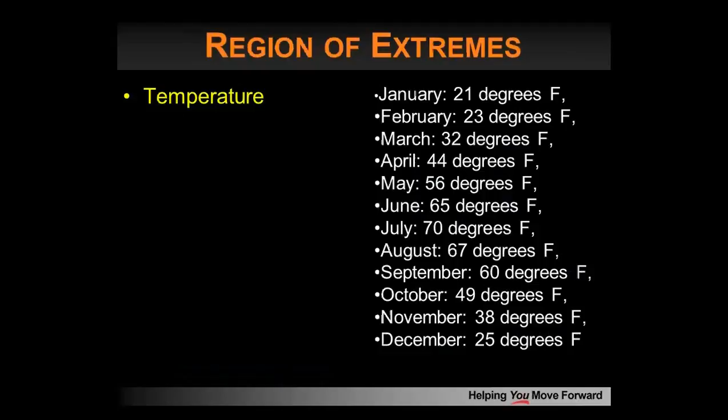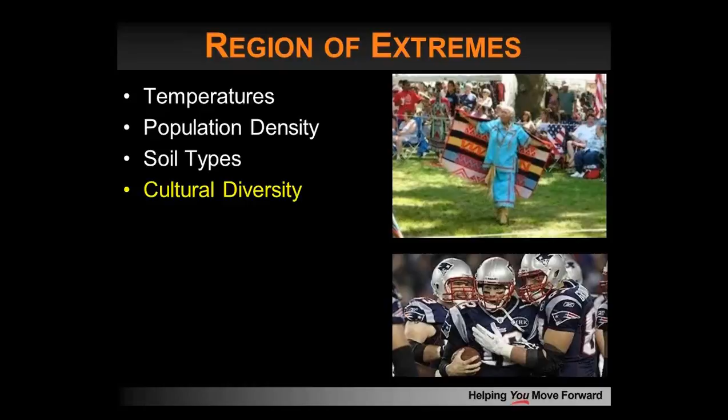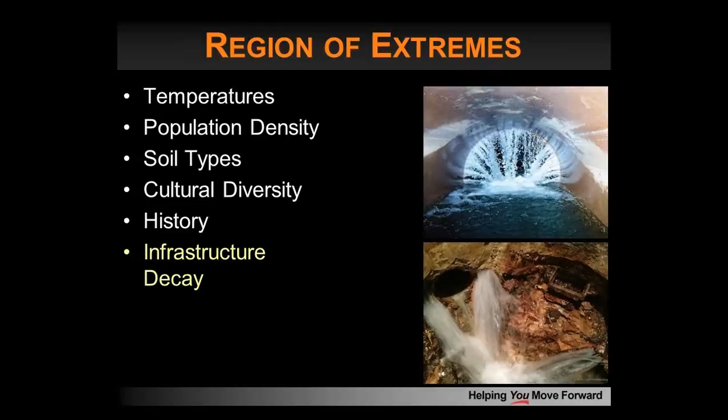So, what is so great about New England? Well, in one word, everything. In this 6-state region, you're the first one to get fall colors, and certainly have the Atlantic Ocean as a hallmark for your region. You're also a region of extremes: temperature extremes, population density, soil types. All these things come into play here. Cultural diversity, history, and because you are a rather older portion of this country, we have what we call some infrastructure decay. That is the reason, driven by infiltration, for the purpose of this webinar, and that is to discuss the role of chemical grout for the restoration and revitalization of aging infrastructure, as well as the sustainability of collection systems in the New England region.

I hope everybody's good with this purpose. You're going to have questions, and I encourage them. In fact, we're going to try and make a 35-minute presentation, leaving 20 minutes on the backside for true interactive question and answer, and that happens through you submitting questions on the question box on the bottom right-hand side of that collapsible dialog box. So that's how we make it interactive, and how we make it relevant to you.

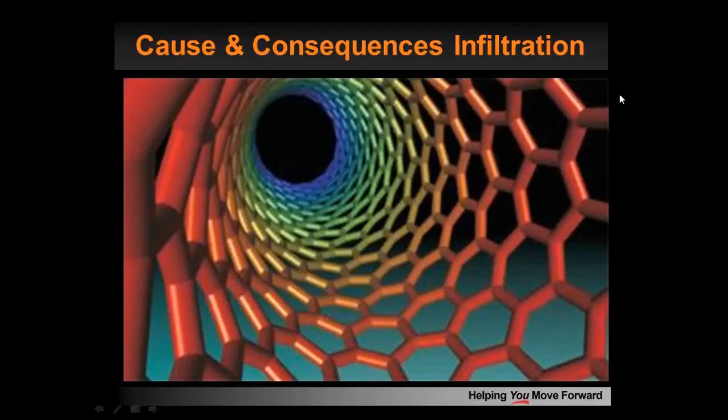As I understand it from talking to Alex, infiltration is a major issue in New England. It is in all parts of the country, but especially New England because of the conditions up there. And I'm now going to ask Mark Anctil to take on the first presentation, and I will make you presenter, Mark, right now. If you'll acknowledge, I appreciate that.

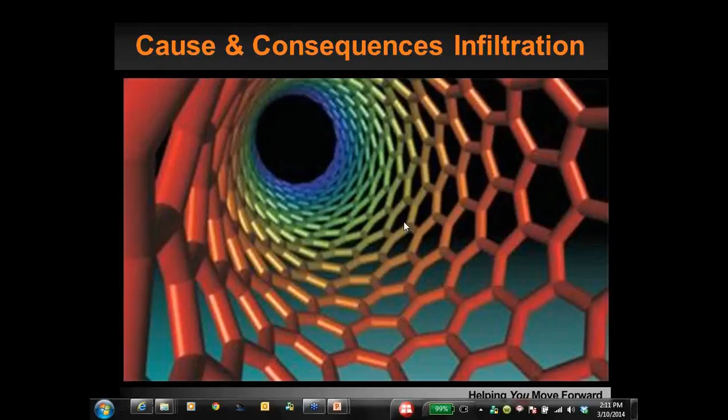All right. If I can get this rolling. Okay, everybody can hear me. Thank you for attending.

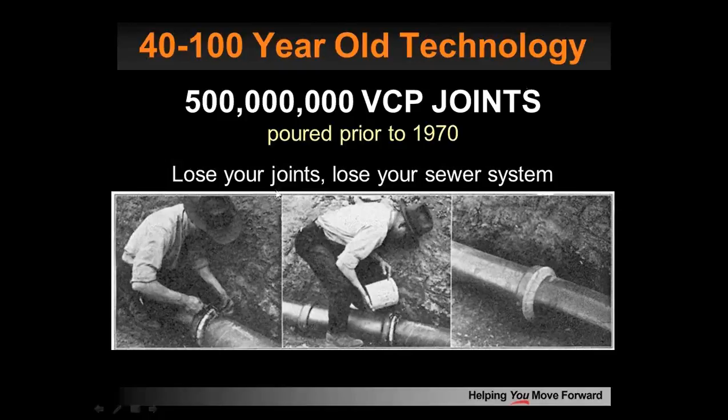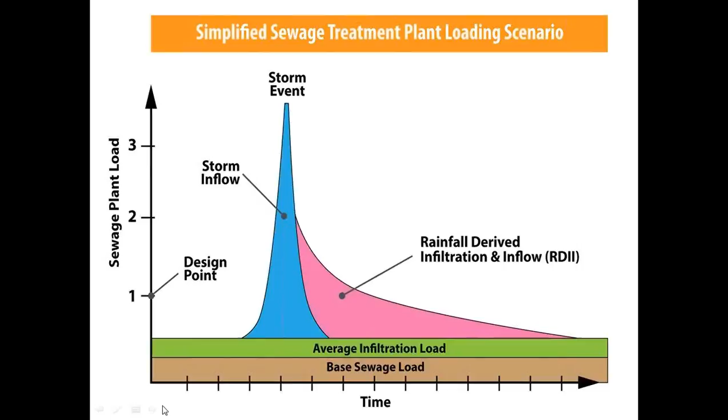Before we understand infiltration, we basically need to understand what we have, or what we've been given as a system. So if we go back the last 40 to 100 years, we've got lots of pipe in the ground, and that means lots of joints. We're seeing a gentleman right here basically pouring hot tar over a joint on clay pipe. Clay pipe is one of the best pipes in the world, but if our joints basically fail, then our system fails. Everybody's seen this kind of chart before, where we have rain-derived infiltration and inflow after a storm event — we hit a peak, and a few days or hours after that, flows go back down to normal, whatever normal is. This is a famous EPA drawing from the 90s.

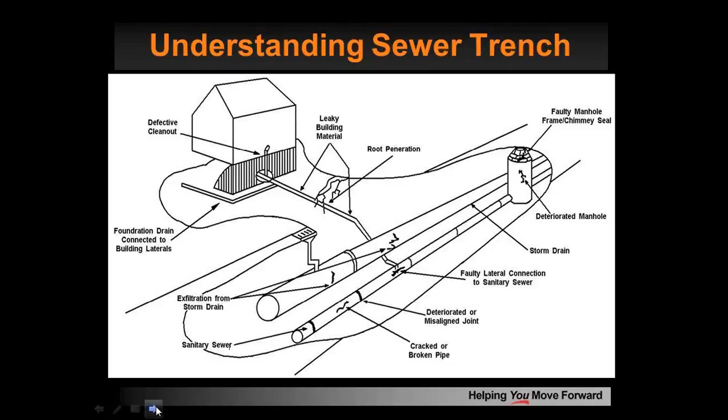This is basically what we have in the ground. We've updated this drawing to this year, and there are a lot of pipes in the ground, a lot of different trenches. This is only pipes—there's utilities also that we're not seeing.

All these are basically pathways or highways for any trench water to travel and migrate between each other. We have our house foundation drains, our gutters coming down, storm sewers, laterals, mainline sewers. So it's a big underground utility spaghetti.

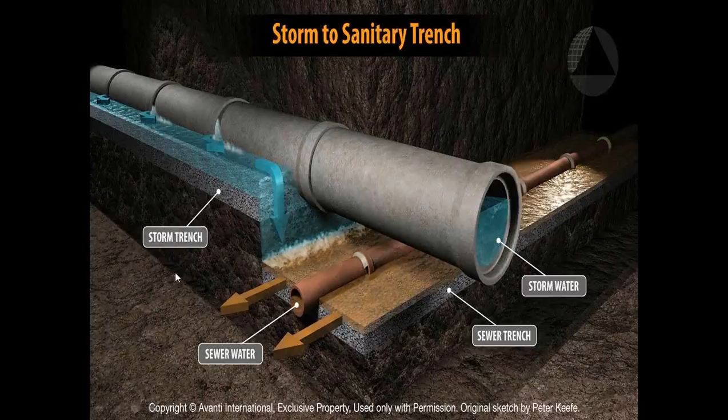Here's another close-up view. Typically our storm sewers are not as deep as our sanitary sewers, but they will cross paths in a way that makes it easier for trench water or water escaping from the storm sewers to get into the sewer system and overcharge our systems.

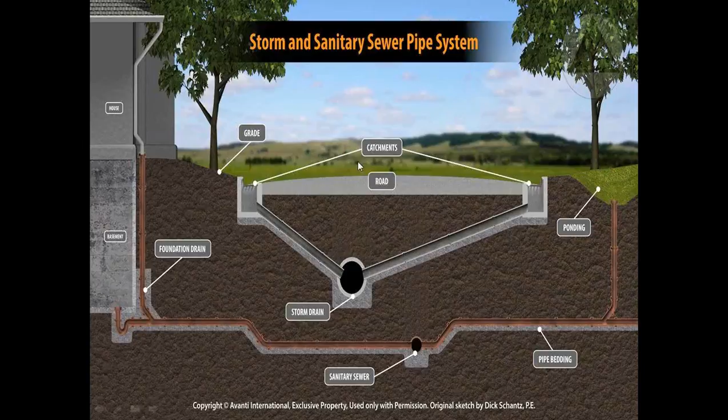Here's another view of the whole thing. We have our catch basins, or catchments, foundation drains, storm sewer, sanitary—basically whatever is underneath this. If I can get this down here.

Green represents infiltration or groundwater. Our sewers are basically near or above the groundwater table. But as rain events happen, the ground is being surcharged with water. Anything within the storm sewer system that's not completely watertight will fill up the ground, and infiltration occurs from our storm into our sewer system.

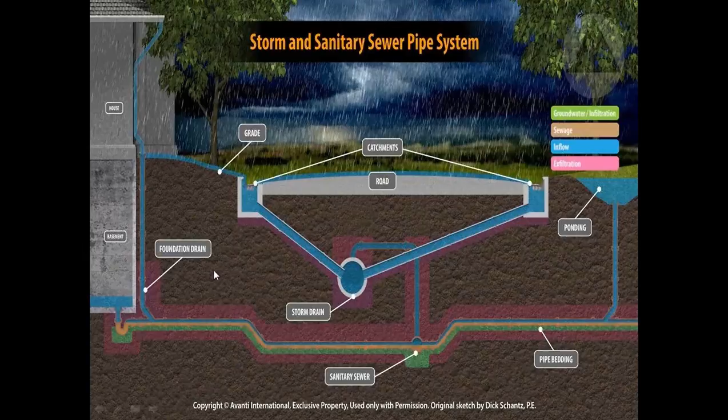So if we have this rain event and it surcharges everything, then we get exfiltration. That means sanitary sewer water going out into the soil. Not good either. As this happens, we have water going out and then water coming back in after the surcharge.

So exfiltration is sewer water going out into the soil—this is what we see here with the pink. On the green, we'd have our normal or below-grade groundwater, and this raises the ground level. Infiltration occurs, so we have this movement of infiltration and exfiltration back and forth.

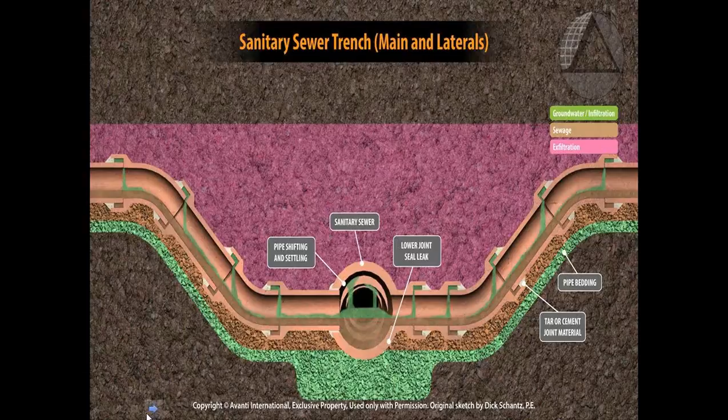Here's what we mean by infiltration—water from the ground coming in. As this happens back and forth, left unattended, we're going to get areas, or first SSOs, maybe even CSOs, depending on our system. The more it's left unattended, we're undermining the sewer system. The joints are pathways for water and fines to come in, creating areas where what used to be a simple infiltration problem becomes more of a structural issue.

Here you see whatever's being non-supported over time—that's creating the problem, leading to complete failure of the system.

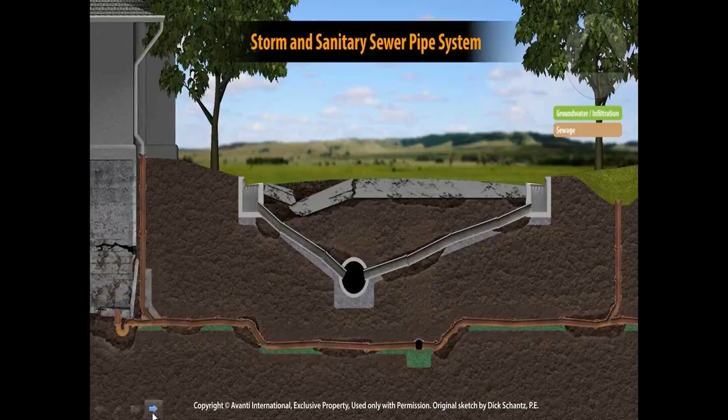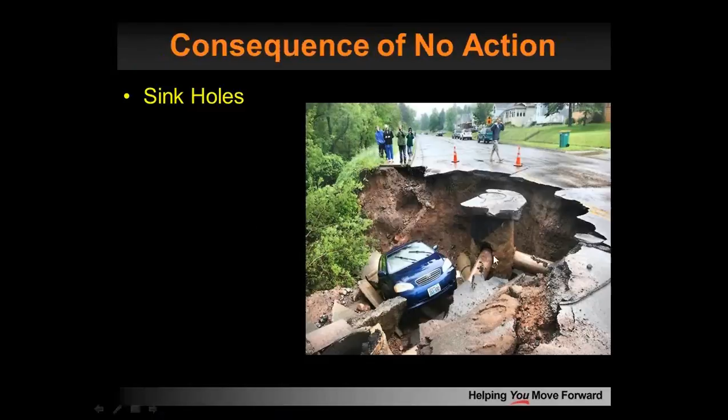So what's our moral obligation to future generations? What do we need to do here? If left unattended, things like this can happen, and they have happened. Our structures are sound, but the joints were leaking, allowing groundwater and fines to come into the system.

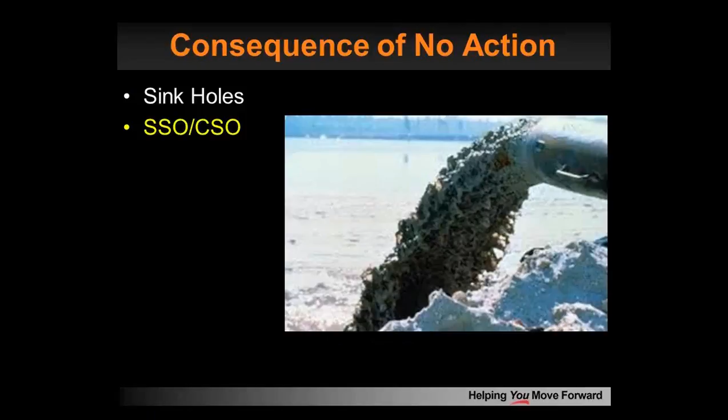As this happens, we surcharge our system, putting water back where it belongs, but untreated. Not good—increased cost to treat at the wastewater treatment plant. More water coming in dilutes the chemicals we use in treating this water.

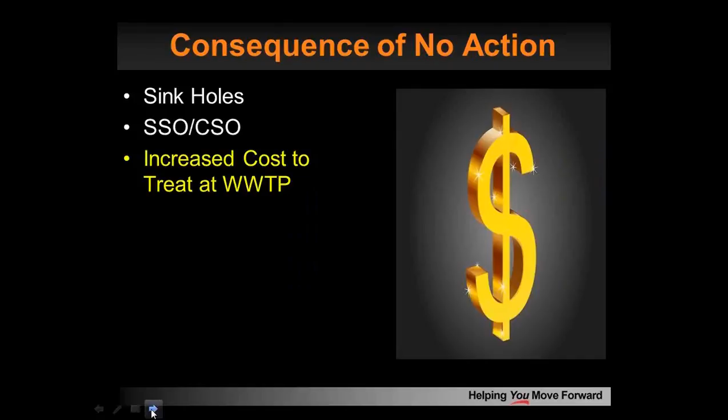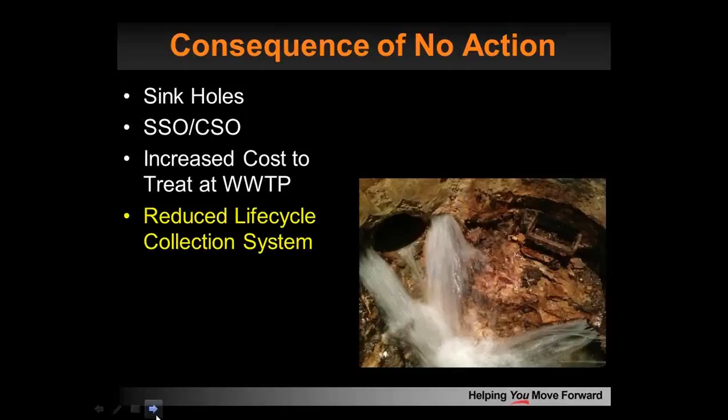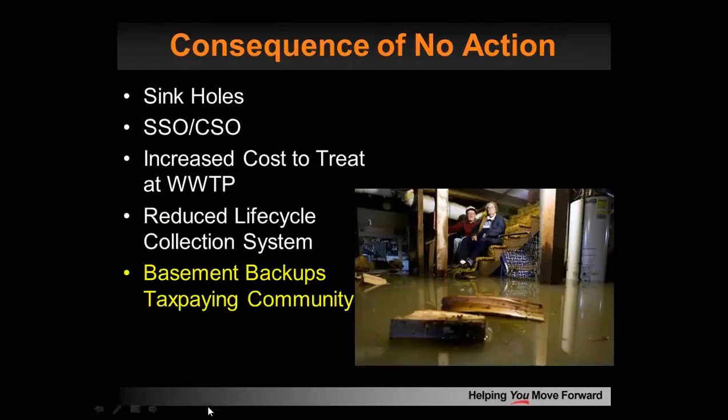Reduced life cycle of the collection system. This amount of water coming in, pump stations will be running 24 hours a day. So there's the cost of the pump station and running it, plus other infrastructure. And of course, basement backups—taxpayers don't enjoy this kind of scene.

So with this, what do we need to do? Well, proactive maintenance beats reactive repair every time.

All right, so we'll spend a couple of minutes talking about the sources of infiltration and the system as a whole. You can see on the diagram here we've identified four points of entry.

You've got manholes, mainline joints, lateral connections, and a few feet up the lateral. They've grouted as much as 30 feet up the lateral in one shot.

But what's significant about this diagram is that if you focus on stopping the infiltration, say just at the mainline joint, where does the groundwater go? It's going to follow the path of least resistance and come in at a different point—maybe at the lateral connection or maybe at the manhole. So you really have to focus on sealing the whole system in order to see a reduction of flows at the treatment plant.

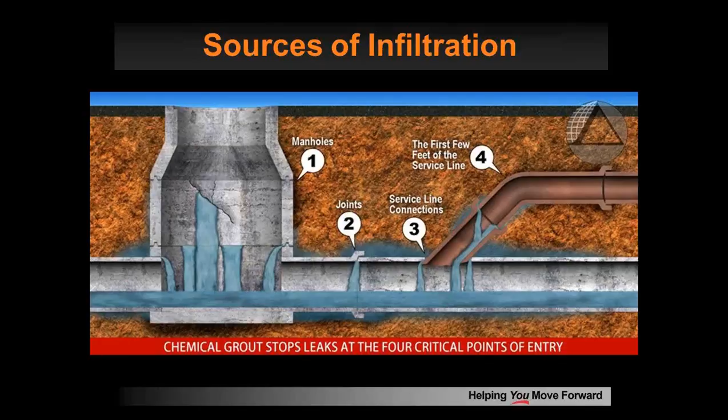This next slide, the process of sewer failure, is probably my favorite slide in the whole presentation. If you look at stage 1, the initial defect, you see groundwater coming into that joint, and if they grouted it now, it would last for decades. On the top right, the pipe is structurally sound, everything is good—it's just infiltration.

In stage 2, if they haven't done any proactive or preventative maintenance, you see the void outside the mainline joint getting bigger as the fines come into the pipe, and you're starting to see deformation of the line.

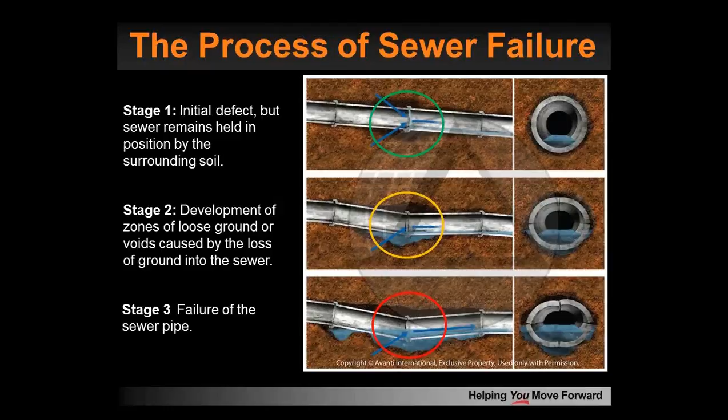And on the far right, you see some structural problems beginning. They could potentially grout that now as well, but if they don't do anything, stage 3, you have failure of the pipe, and now you can't grout it. You definitely have a structural problem, and you have to have a structural solution, which is going to be more expensive and more of an emergency repair than proactive maintenance.

So what are the rehab technologies out there? You see dig and replace, fold and form, sectional lining, pipe bursting, slip lining, CIPP, and chemical grouting. All the ones that are white in color, what do they have in common if you look at each one of those? They're all structural rehab technologies.

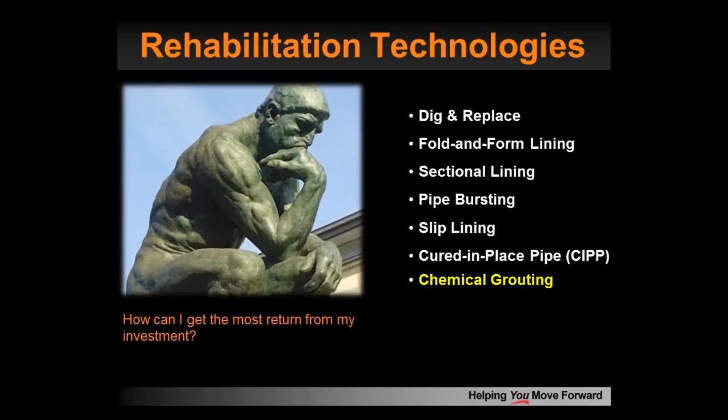If you have a structural problem, then you need a structural solution, and that's great. The problem is a lot of engineers spec structural solutions when all they're really trying to do is stop the infiltration. And that's where chemical grouting comes in. It's the only solution that's specifically designed to stop infiltration.

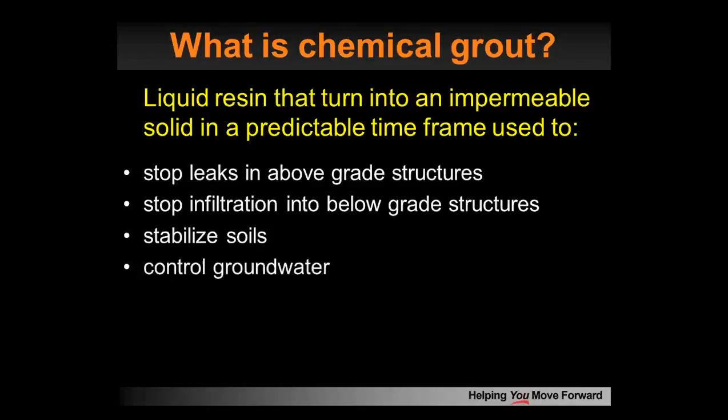So let's take a look at how grouts work and define it. Chemical grout is a liquid resin that turns into an impermeable solid in a predictable time frame. It's used to stop leaks in above-grade structures, stop infiltration in below-grade structures, stabilize soils, control groundwater, and seal the annulus between the host pipe and the liner.

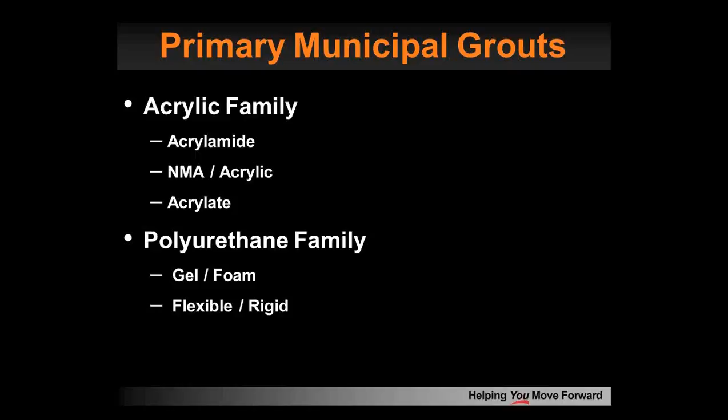In the municipal market, there are essentially 2 families of chemical grouts. We've broken it down to the acrylic family and the urethane family. Acrylics are further divided into acrylamide, acrylic, or acrylate grouts, acrylamide being probably 90% of what's used out there. Polyurethanes are broken down into gel or expansive foam, and that foam can either be flexible or rigid. It's flexible if you're in a moving concrete structure, or rigid if you're filling voids underground.

So it's the thinnest product on the market. It can go anywhere water goes. There's no suspended solids. If you're pumping cement underground, that cement is only going to go through the soil or through a crack fissure as far as that particle size will allow it to go. Well here, there are no particles, no suspended solids, so it can go anywhere water goes.

Field adjustable cure times - the contractor on the grout truck can make this liquid turn into a solid in 5 seconds, all the way up to 10 hours, depending on how far they want it to travel in the soil. In municipal applications, it's usually not extended that long - they usually don't need it to be that long of a cure time, but they can control it if they need to. They can also control the gel strength if their CCTV shows that they've got a lot of infiltration in this particular segment of the line. They can pump a stronger grout to compensate for the dilution that they know they're going to get when they grout that section.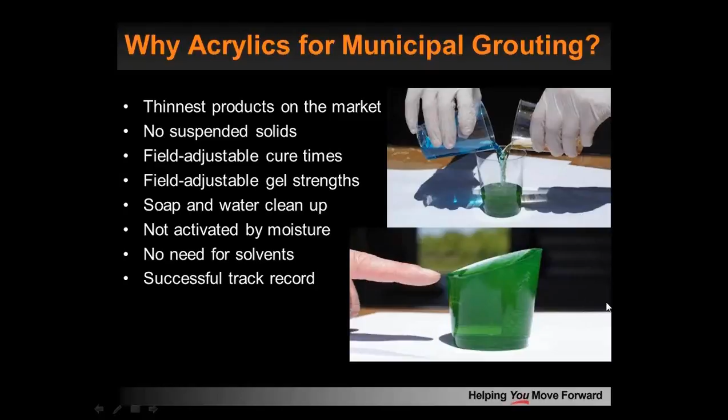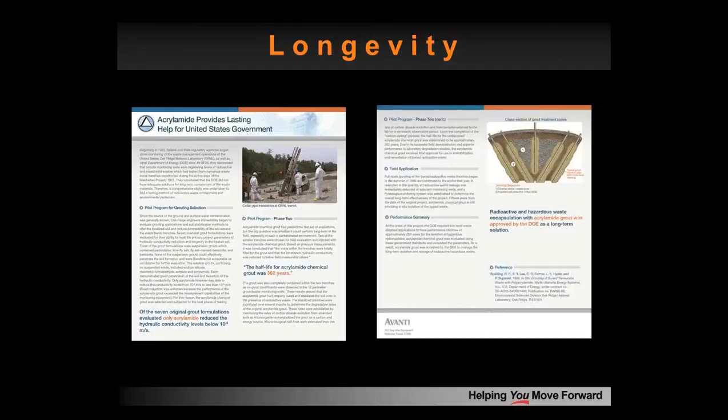They started using acrylamide grout in the U.S. - Halliburton started using it in the 60s for soil stabilization. In the 70s, they started using it to seal mainline joints. And that leads me to the next slide, which talks about longevity. The U.S. Department of Energy in 1985 started a 20-year study where they studied 7 different types of grouts, and they were trying to determine what they wanted to use to encapsulate some radioactive waste in Oak Ridge, Tennessee.

They chose the same grout used in municipal mainline and lateral sewers, acrylamide grout, which was given a 362-year half-life in the soil. That was significant because people said this grout only lasts a day or so, since they'd let it sit on their desk or in the parking lot. And that's right—if it's not underground, it will shrink and shrivel up.

But when it's in a moist or even humid environment—like tunnel projects we supply grout to in Egypt, where it's very arid but there's enough humidity in the soil to keep it happy—it performs well. In a municipal application, there's moisture outside the pipe in the groundwater and humidity inside the pipe from the sewage, so the grout stays happy and can last a long, long time. With that, I'll pass it over to John Heitkamp.

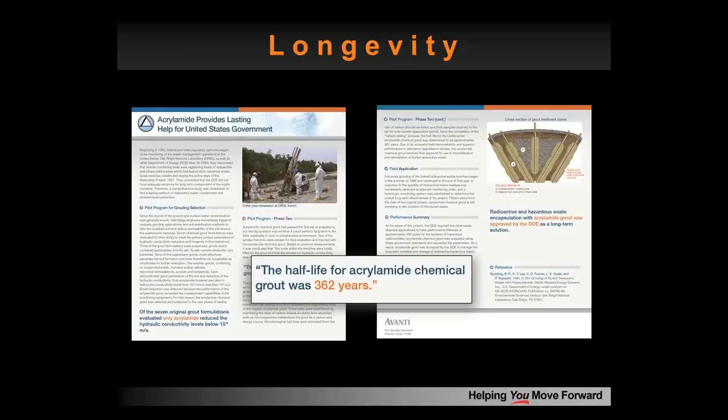Thanks, Daniel. Good afternoon. I want to talk briefly about the actual application of chemical grout into our sewer joints and lateral connections. The first part is proper preparation of your pipelines and laterals before you can go in and chemical grout. This could involve a preparatory TV inspection to identify which joints might be leaking, as well as root cutting and pipeline cleaning to remove debris. All of this should be done ahead of putting your packer in to start the chemical grout injections.

Some of the components are shown on screen here. You have your packer down in the pipeline that's actually injecting the grout, leading into the grout truck, which has your chemical tanks, pumps, and CCTV operator compartment. The chemical grout is typically stored inside the truck and gets mixed there. You'll also notice the minimal traffic impact this setup has on a typical municipal street.

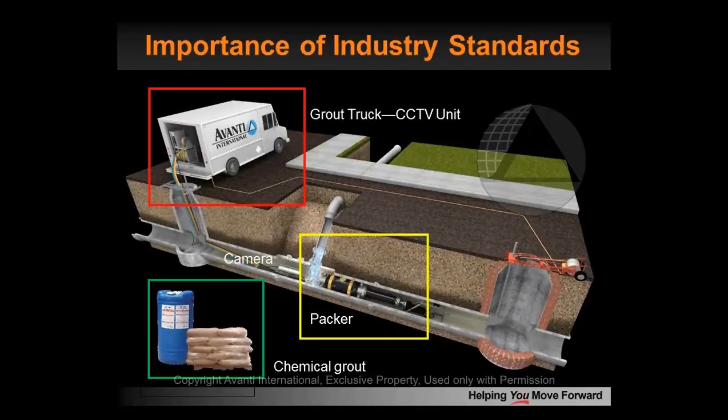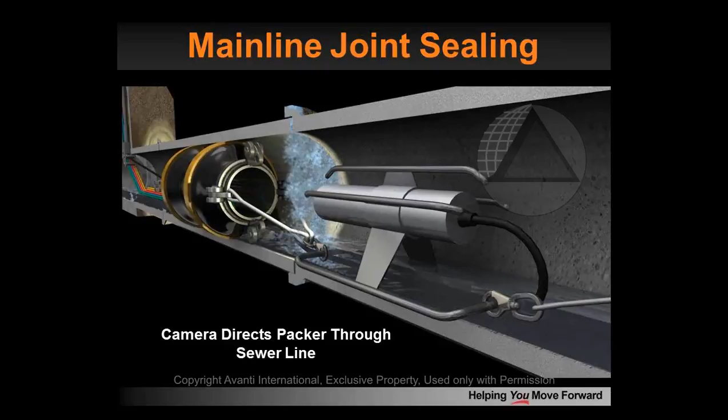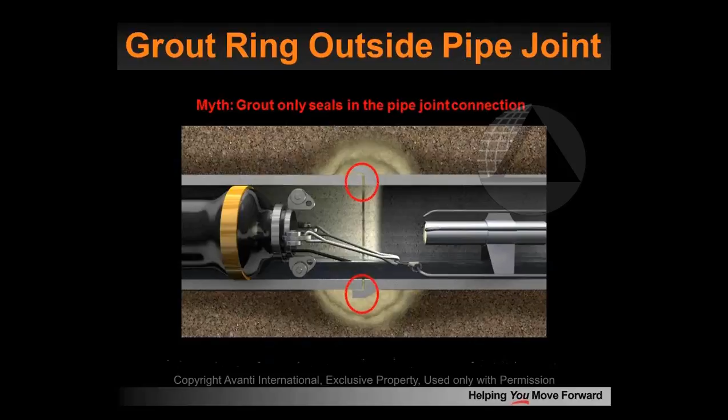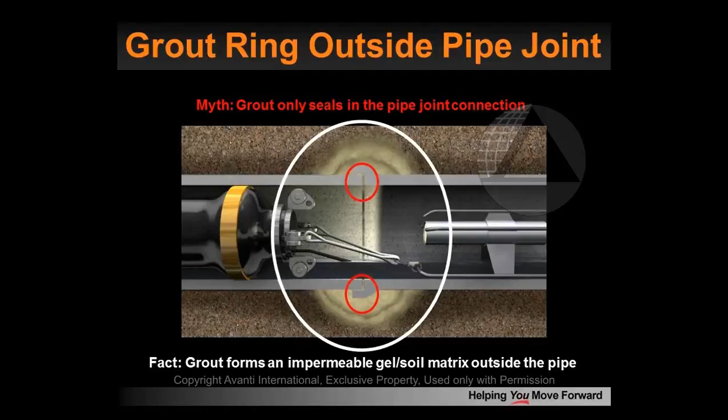Once the packer is inserted into the pipeline, you use the camera to guide it onto the joints—you see this infiltrating joint here. You pull the packer onto the joint, and the end elements inflate around it, creating a void around the joint. Once the void is created and sealed, you pump the grout in through the packer, and it goes out into the surrounding soil and forms a gel that stops the infiltration. It's a common myth that this only seals that one area of the joint, but in actuality it surrounds the soil and creates a grout collar around the pipe that forms the barrier to infiltration.

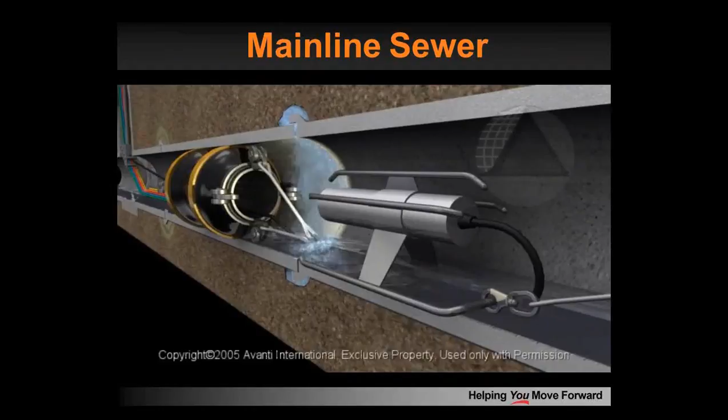This is a little animation about mainline sewer grouting. You can see the infiltrating joint here. The camera guides the packer onto the joint, the end elements inflate and create the void, and the grout is injected out into the surrounding soil. This is sometimes done at multiple stages until refusal. Once the grout is cured, the elements of the packer are deflated, pulled away, and you examine the joint to see if any infiltration is left.

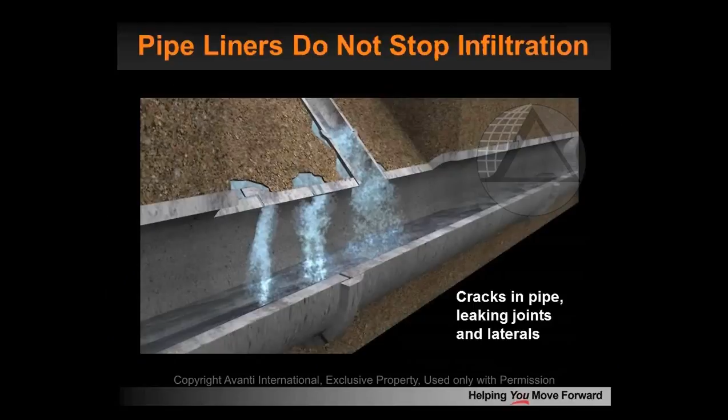Another common fallacy is that CIPP lining stops infiltration, but it doesn't—it just moves it around. You can see the liner coming through here. It stops the infiltration until they reinstate that lateral connection, but it's just diverting all the infiltration that was originally coming in through the cracks in the joints up into that lateral, and it pours into the pipe at the same rate.

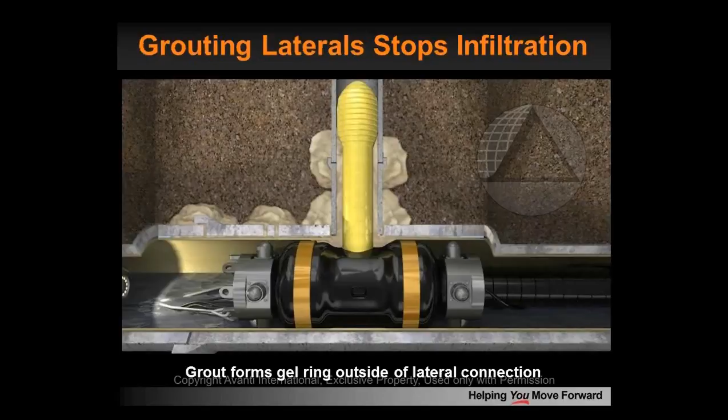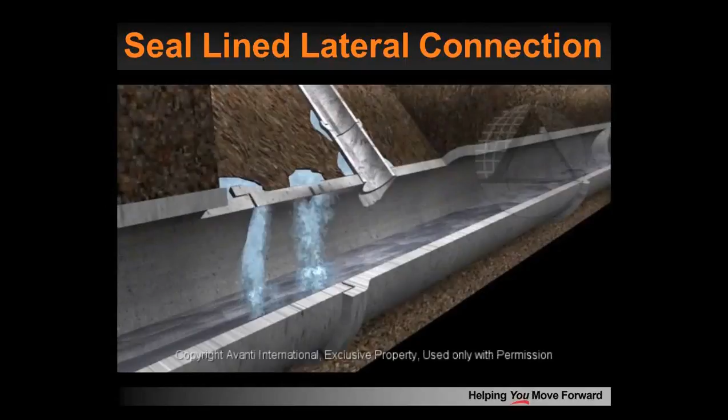With lateral grouting, you can actually stop that infiltration permanently. It's a similar process where you're pumping the grout out into the surrounding soil, creating a collar around it. Here's a little animation about lateral grouting. It's typically done in 4 to 30-foot increments up the lateral connection, depending on the municipality and the configuration of the laterals.

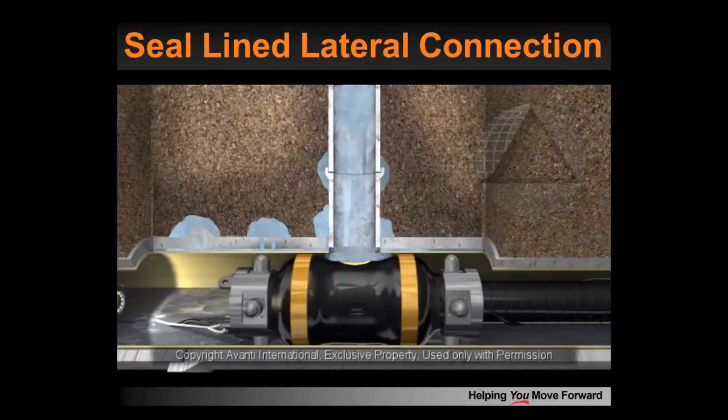You see the liner and the sealed lateral connection. The camera guides it in, and the packer is rotated so the lateral sock lines up with the lateral connection. The elements are inflated on the outside, and the lateral sock is extended up the lateral from 4 to 30 feet. The grout is injected, creating the grout collar that seals around the leaking joints and defects, and also seals between the host pipe and the CIPP liner. Then everything is retracted and it moves on to the next service.

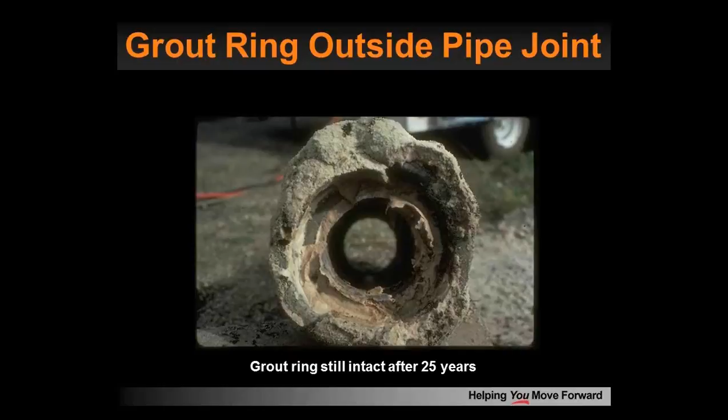There's an example here of a grout donut that was dug up in the ground. It's been in the ground for about 25 years. You can see the longevity that the grout has, and it's still all attached to the pipe. This joint is watertight, and it's been in the ground for 25 years. So there is some longevity to grouting, and it's going to be an effective solution to stopping infiltration.

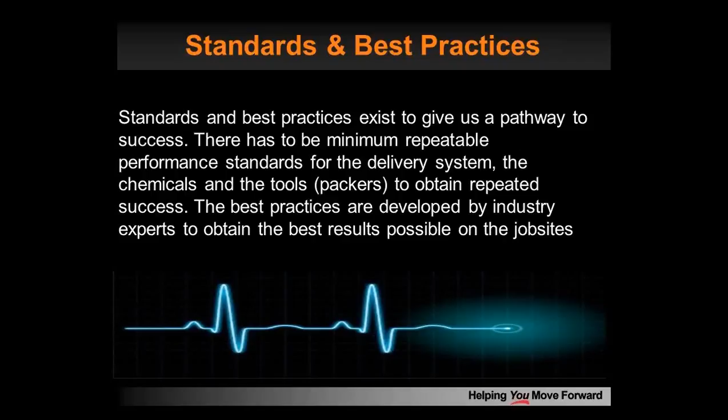Thanks, John. In order to be successful, we do need standards and best practices. There's got to be minimum repeatable performance standards for the delivery system, the chemicals, the tools, in order to get success. These best practices have been developed by people in the industry with lots of experience, technologies, and know-how. One of these documents is the Suggested Standard Specification for Pressure Testing by NASSCO. This is a document put together by engineers, contractors, technical providers, and it's been peer-reviewed.

So this is a very important document, and I encourage you to have a look at this. Other standards that came into being, I think in the early 2000s, are ASTM standard practices to seal mainline joints, to seal service connections, and to seal manholes. And again, we have the NASSCO and ICGA suggested standard specifications. They're documents that are there to make sure that the process is done to the best of your abilities.

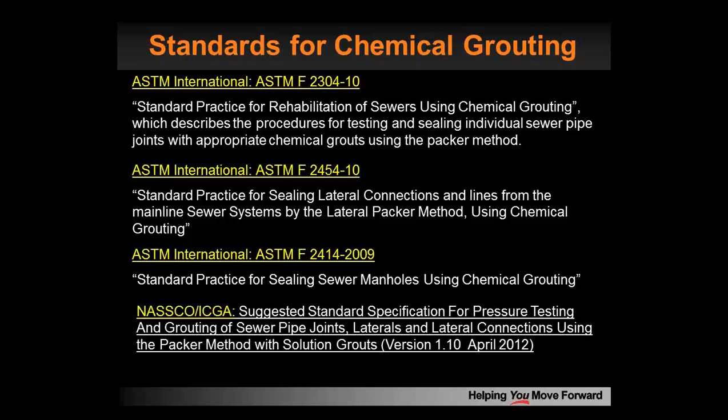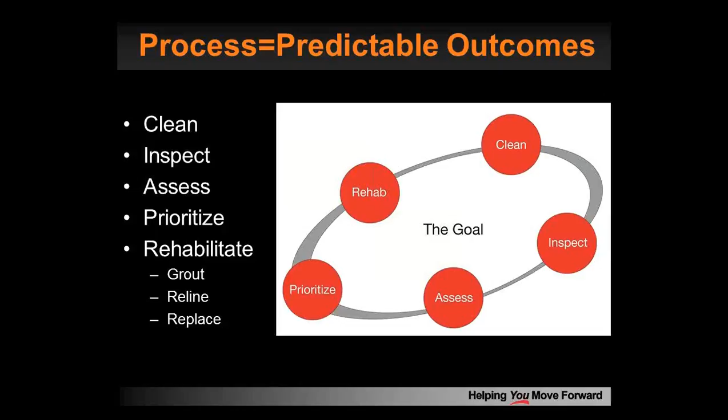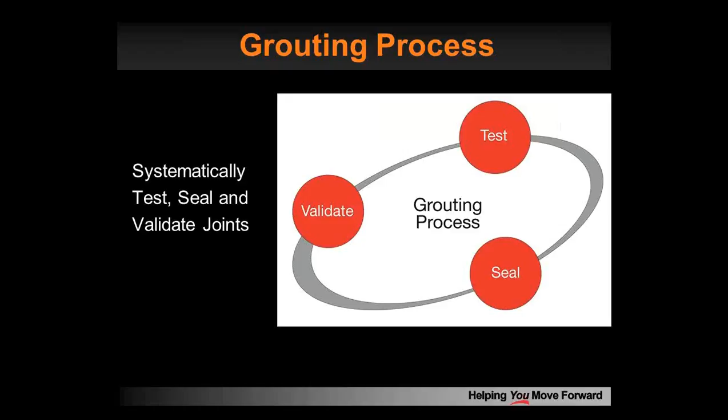So our grouting process, or test-and-seal process - because this is a process, it is a test and seal - our first step is testing the joints, service connections, and sealing the ones that are not passing these tests. Seal till refusal, pump the amount of grout that's required, and of course validate what you've just done with a post-test.

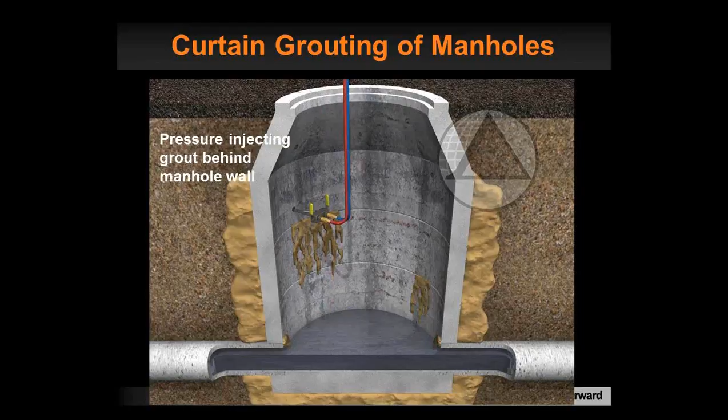Here you see an image of curtain grouting, where they drill a hole straight through the structure and pump the same grout used in the municipal, mainline, or lateral grouting into the soil outside the structure - whether it's a manhole, lift station, or wet well, it doesn't matter. They create an impermeable curtain around that structure. Especially if you've got a brick manhole, you're not going to want to chase the water from crack to crack or in between all the bricks. So here, they encapsulate the whole manhole rather than chase the water around.

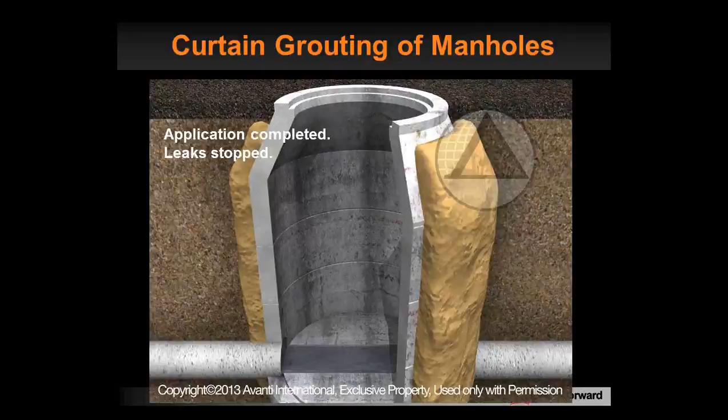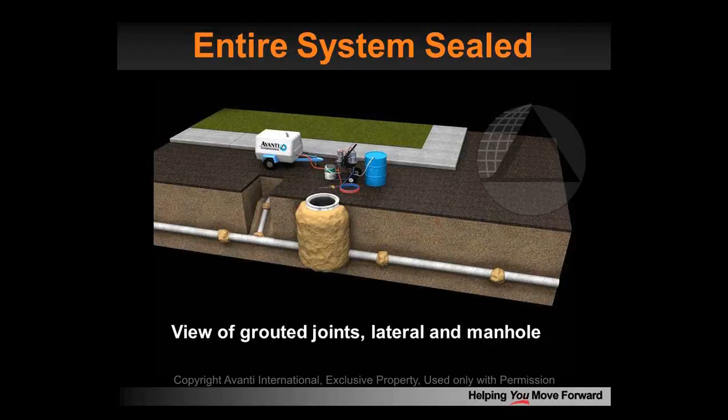Thank you, Daniel, and good afternoon, everyone. Thanks for attending. Over the past 40 years or so in the chemical grouting industry, the science of the available materials and equipment, and the art of their application, has progressed and improved significantly to the point where we now have proven standards and procedures in place. The industry has indeed come a long way.

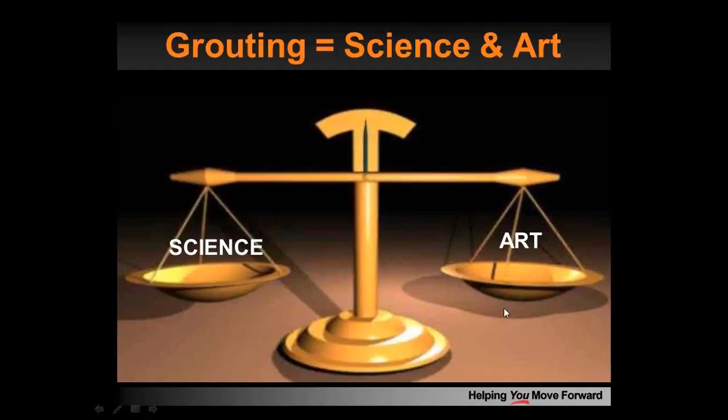Chemical grouting was the first available technology for improving the efficiency and longevity of our underground infrastructure. Where the structural rehabilitation methods we mentioned earlier are not required, chemical grouting is the most cost-effective technology for reducing infiltration in all components of your system, be it manholes, laterals, or main lines, as we've shown. Therefore it should be the first choice for rehabilitation.

I'm kind of a relative newcomer to this group, having only been directly involved with chemical grouting for about the past 3 years. As Don mentioned earlier, prior to that I spent about 17 years with Insituform working on structural rehabilitation. In that time, I spent a lot of owners' money installing structural rehab where the sole intention of the client was actually just the reduction of infiltration.

In my 3 years being involved with the chemical grouting industry, I've certainly become convinced that it should be the first option considered. And of course, those of us here are all representatives from the industry, but it has been evaluated and endorsed through other educational and professional sources as well.

And Don, I'll turn it back to you. Well, I think this is a profound statement that Dr. Vipulanandan has made from the University of Houston: 'To date, the only proven method of stopping infiltration is the application of chemical grout. Based on its cost effectiveness, durability, and method of leak repair for sewer pipe joints, manholes, and laterals, chemical grouting has proven to be the least expensive remediation alternative for stopping leaks and infiltration.'

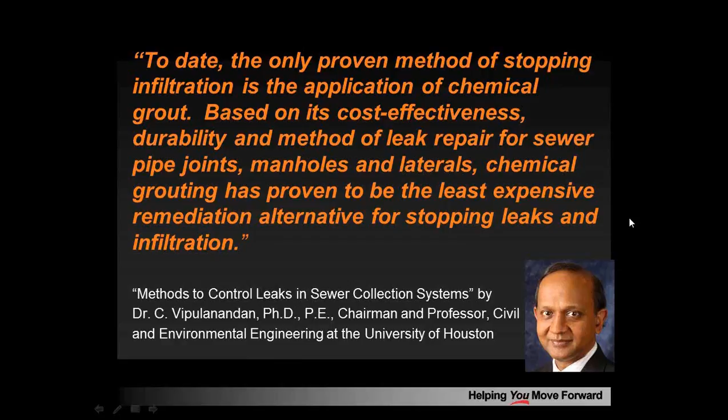So let me think about that, let me restate that again and direct it. How would a work plan be presented to a client prior to work? And we're trying to see how we can assess both the plan to grout and how effective it is.

I'd like for John to take that on, if you could.

Well, as far as determining the effectiveness of chemical grout, it's typical on many of the projects we've done where they've actually gone in at nighttime and taken infiltration weir readings in the individual pipelines. Then they come in and do the chemical grout application, and after that is done, they'll come back and do weir readings again. So you're seeing the actual reduction in flow per line section, which you can compare to the cost of actually grouting that pipe.

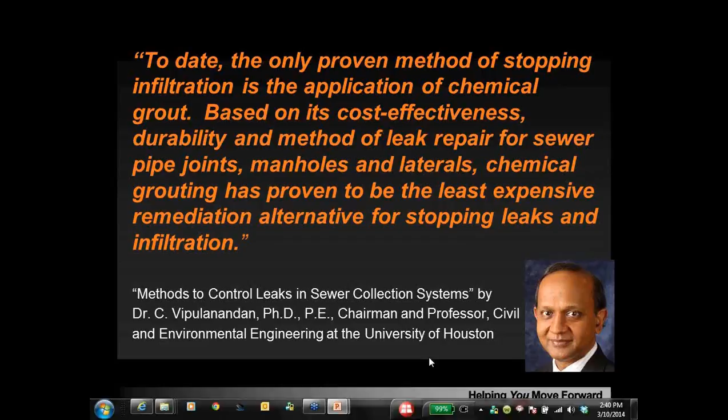As far as the plan goes, I'm not exactly sure what they meant by that, but it's typical that sewer pipes or a system will be televised ahead of the grouting coming in. Determinations will be made about the type of rehab that's going to be most effective based on the results of the TV inspection, and then a work plan will be developed from there. I think that was what was kind of alluded to.

I think you're right. I've got another question here that I knew was going to come up at some point. We're looking for cost comparisons, guys. What's it cost? What are the comparisons with other technologies? For instance, a rule of thumb that I've been operating on is if you spend $1 in grouting, you can spend $3 to $4 in lining. You can spend $10 to replace, to rip and replace. I think that's really a fair comparison.

Do you think you can be any more specific? Like Daniel or Mark, you and I have studied this for a while. We think that we know a price per foot for grouting, a price per foot for lining. Can you all go into detail on that?

Yeah, this is Mark. This is going to depend. If you're going to get a contractor to go out and just do a couple of joints or a couple of services, the price may be radically higher. But if you have a test and seal program where you're going to test all the individual joints and seal the leaking ones, then the cost is probably going to be down to about a third of what lining costs, and maybe a tenth of what replacement costs.

Now, if you're doing laterals further up the line, if you're going 30 feet, you're going to have to inspect the lateral and clean it. But if you're doing the first 4 or 6 feet, typically lateral inspection or cleaning may not be required, depending on the conditions and what's going to be seen with the pan and tilt camera.